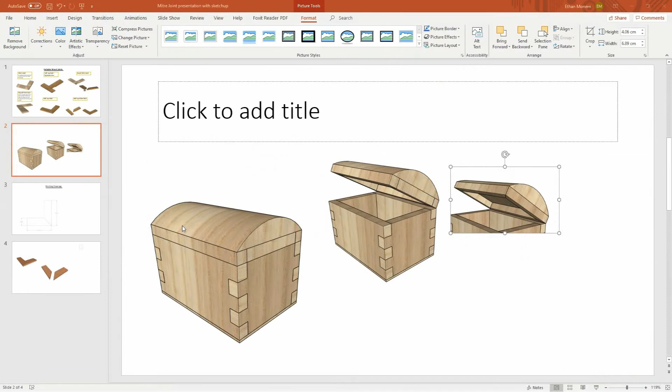Okay, now the next thing we want to do, once we have a final design, just going to close that lid. What we need to do is to create a working drawing from this. So we need to put the drawing with dimensions and we need to lay it out properly. So I did a basic one of our mitre joint. So you can see at this point I've got no rendering on it.

So a working drawing is just a line drawing. It has dimensions, properly done. And again, we can do this in SketchUp. Now, a working drawing has a view from the top, so we call that plan view. And then it will have side views, side elevations, and various others. Now again, in SketchUp, it's very quick and easy to do that.

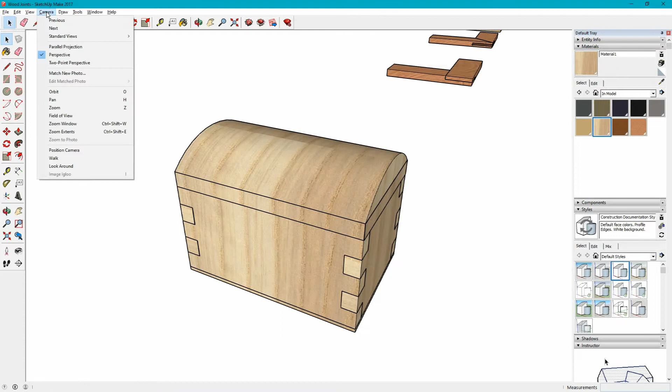So if I click on Camera, the first thing I want to do is take it off of Perspective, and I'm going to put it into Parallel Projection. So that's similar to, if I rotate now, similar to how you would have it, say, in isometric. So all the dimensions are roughly the same. You can see it distorts the view slightly.

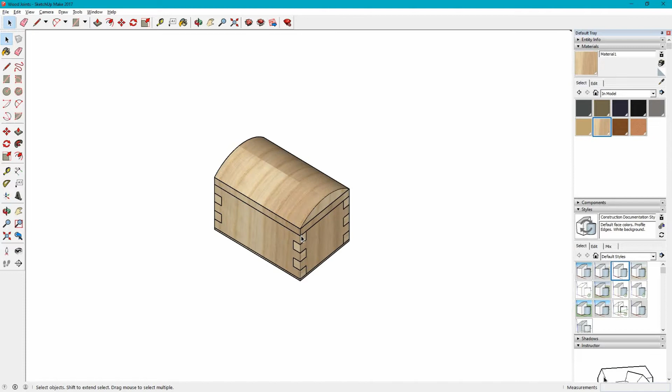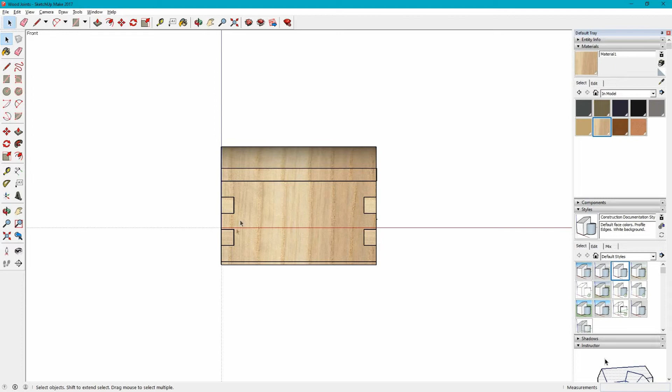So I'm going to go to Standard Views and then I'm going to click Top. So that gives me a top view of my drawing. If I click Standard Views and I click Front, okay, that shows me the front with respect to my axis. If I put the axis on, you can see that's the red and blue axis, so we're looking from the green axis. Again, if I go to Standard Views, there is an isometric view. Click Back, so that's the other side of it.

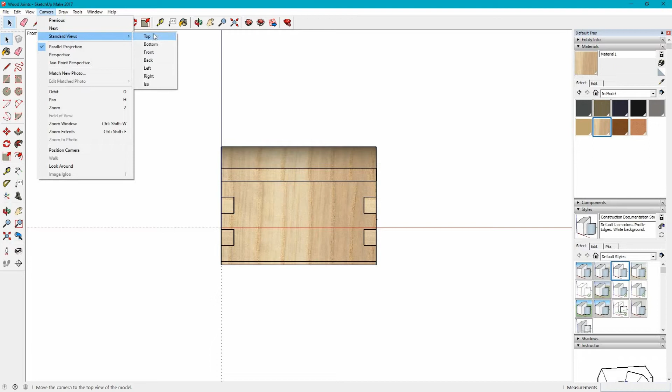Views, Front, I'll just look to the front. So if I go from the left, okay, that's the left view. If I rotate, oh, that's the wrong thing. Let's go back to that. So Left, so that's my left hand view. And you can see the view clearly.

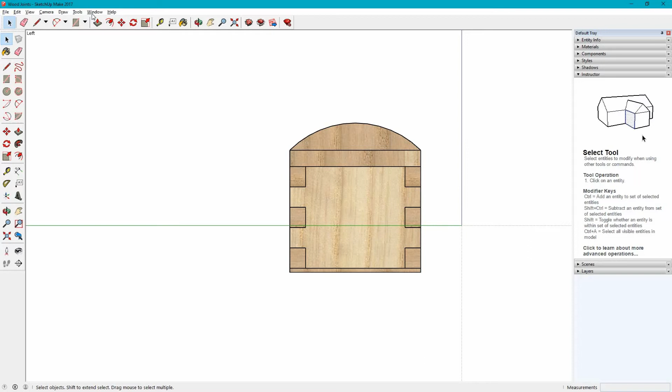Okay, so now before I put dimensions, it's quite helpful to be able to turn the dimensions on and off. So the first thing I'm going to do is to create a new layer to put dimensions on. So if you click Window, Default Tray, and then click Layers, now you can see I've already got it checked. So check Layers. Then in your default tray on the edge here, you will find a Layers button.

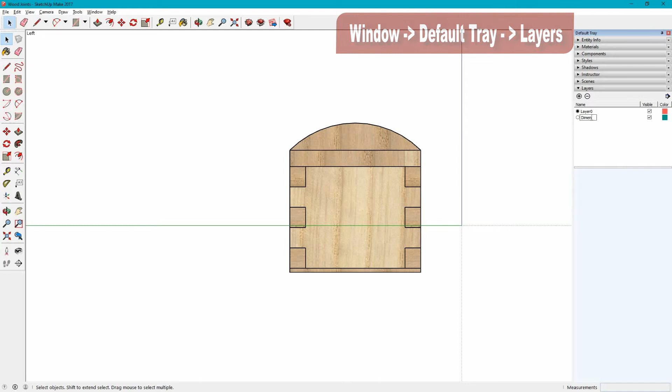So let's get rid of that one. Layers. Okay, now I'm going to add a new layer and I'm going to call it dimensions. Okay, I can then click the button to say that whatever I draw now is on this dimensions layer. Okay. So if you put all your dimensions on that layer, then we can make the layer visible and invisible.

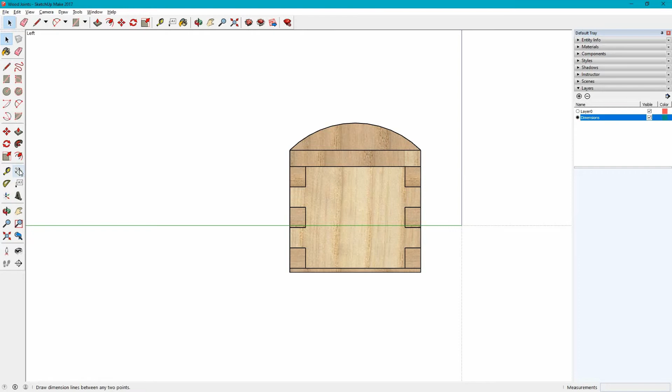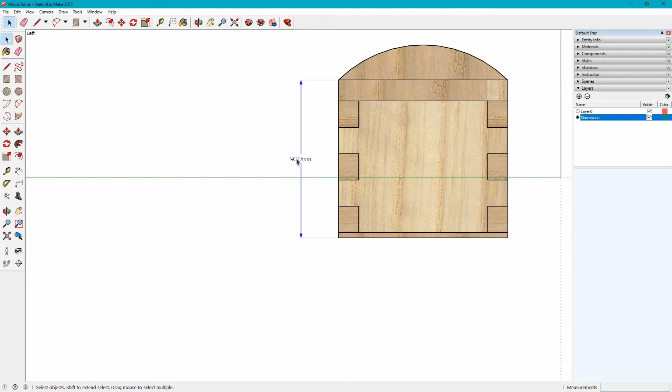Okay, so now I've got a large tool set here, so my dimensions are there. If you haven't, just go to Tools, come down, and there's the Dimension tool. So I click Dimensions. If I click to an edge, to another edge, okay, and then I can place that there. Now, the dimensions on here, because the writing is very thin, it doesn't show up too well. So we can change the position.

If we go to Window, Model Info, and then you can see there's lots of different things we can fiddle with. So I'm going to go to Dimensions. We can change whether you want arrows or not. We're going to keep them as arrows. Now we want to align to the dimension line, and we're going to select all dimensions, update selected dimensions,

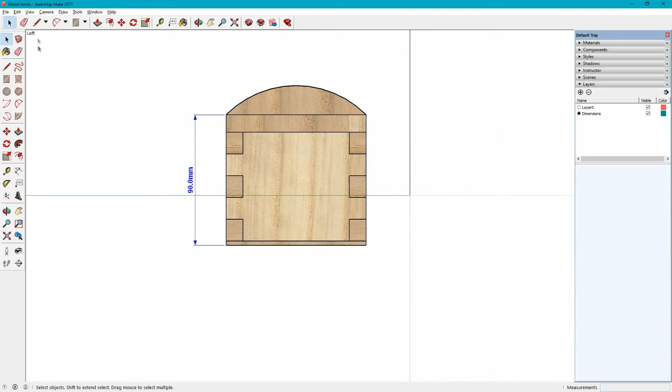and it will show us. Okay, to change the font so that it affects all of our dimensions, I'm going to click Arial bold to make it 14. Click Update and you'll see now we've got it running along the line, not through it. Okay, that should now apply to all dimensions that you do. Okay, so I'm going to get rid of the axis.

You can add in more dimensions, so it would be helpful to have one to show the width on the bottom there. You can dimension certain lines, but you have to be actively editing the component. So that blue line, you can see it's turned blue. If I click on it once, you'll see it adds a dimension. Could do the same down the bottom here.

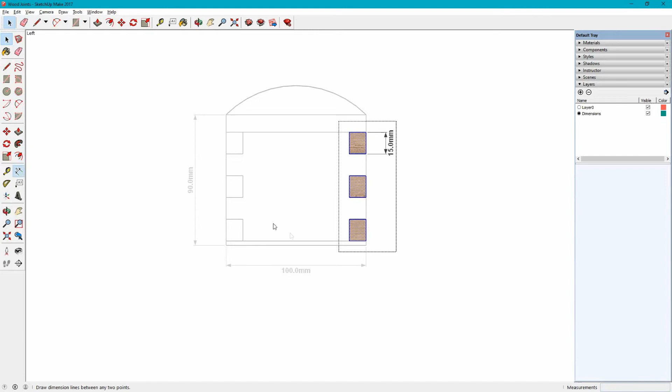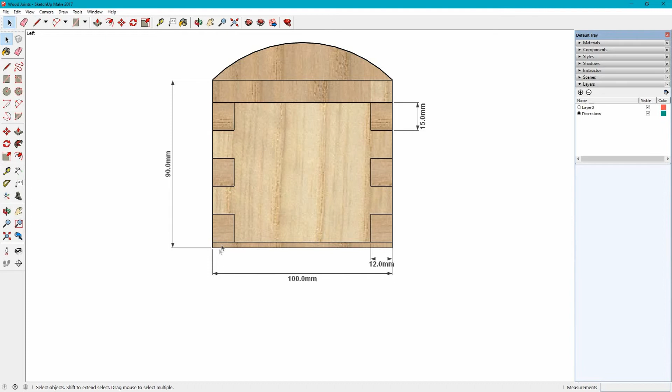So that's turned blue. Put a dimension on there. Okay, I'm going to come out of the edit. Now you can see I've got key dimensions in all of these places. Okay, the dimensions are what we call dynamic. So if I change, I'll just show you, if I go into here, if I were to change the height of this, you can see the dimension is changing with it.

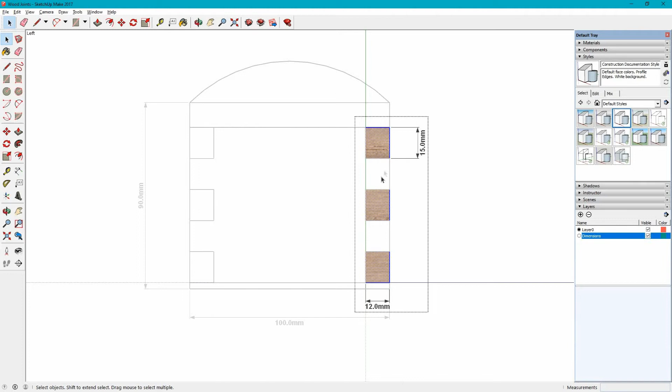Okay, just to go back to that, it's really important that your dimensions are part of the actual group. So you need to edit and then put the dimension in. That way, if you make any changes, your dimensions will dynamically change with any changes you make. Okay. Now, once you've got it set up, we don't want the render to appear on our working drawing.

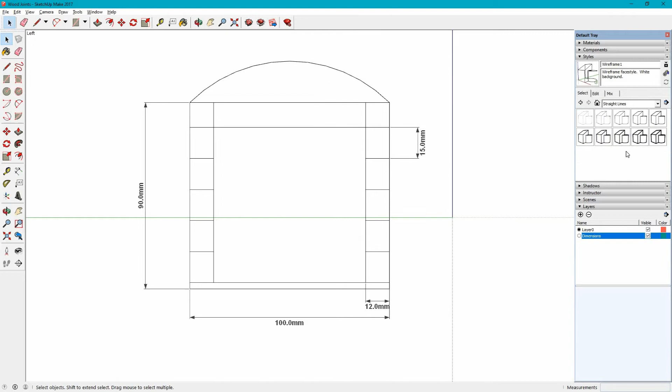So if you've got the online version, you can just click on wireframe and then you've got just a line drawing. I'm not sure about the online version, but if you click into here where it says different styles and we click straight lines, then you can find a straight line drawing which has slightly thicker lines and makes your drawing clearer.

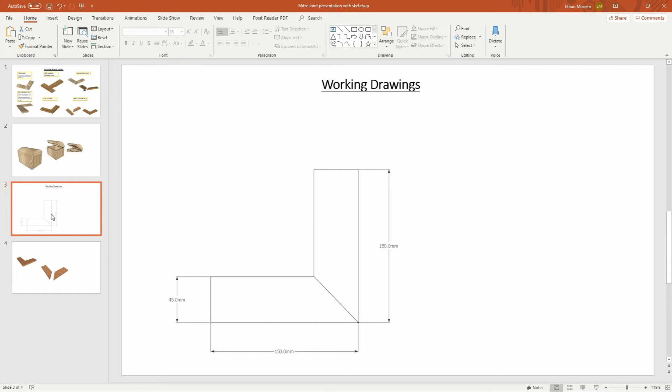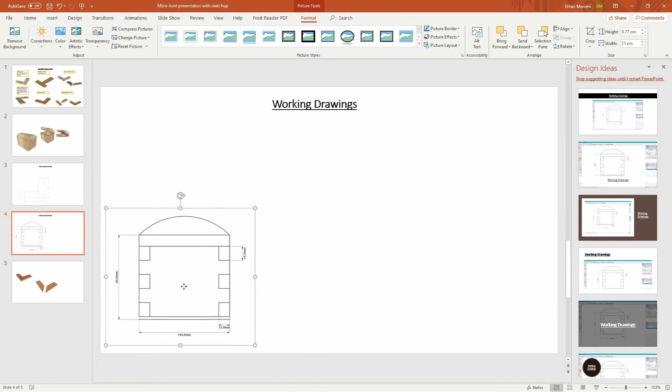Okay, once you're happy, print screen, go to your working drawings, create a new page. So I'm going to create a new page here which says working drawings, put in my dimension drawing, crop it down. Okay, that will be my end view. So if I go back to SketchUp,

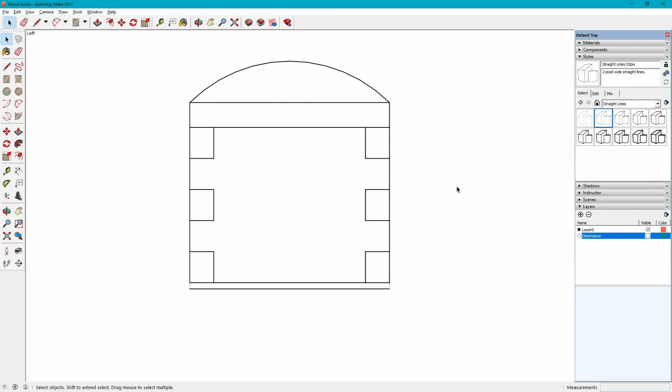now just one thing that I haven't shown you is in the layers, so my dimensions are on the dimension layer. If I go back to the normal layer and then hide, so if I select this to be invisible, then you can see the dimensions disappear. So if I wanted to do other things to this and the dimensions were getting in my way, I would just make them invisible. When you're adding them, make sure that that layer is checked, otherwise they'll be on the wrong layer. Because you can see as you rotate, the dimensions still remain.

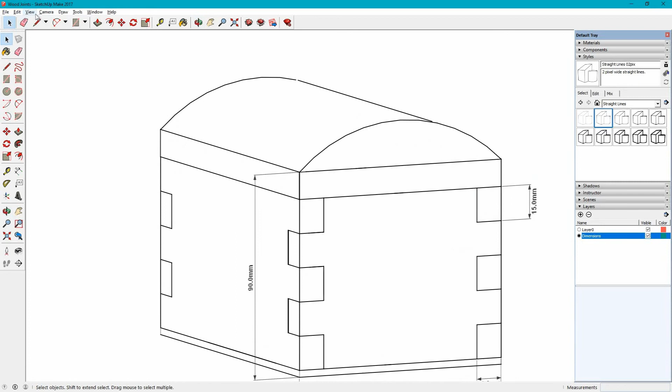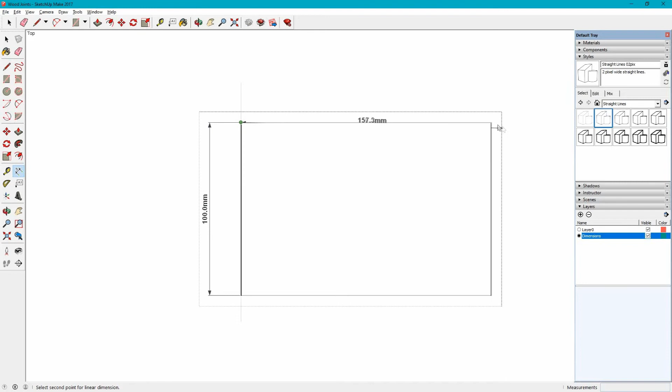Okay, so now let's do the top view. Okay, so I'm going to just double click. A dimension here. I'll put one in here. For some reason that's slightly longer than I expected, but for this demo, it doesn't matter. Print screen, go back, pop that in.

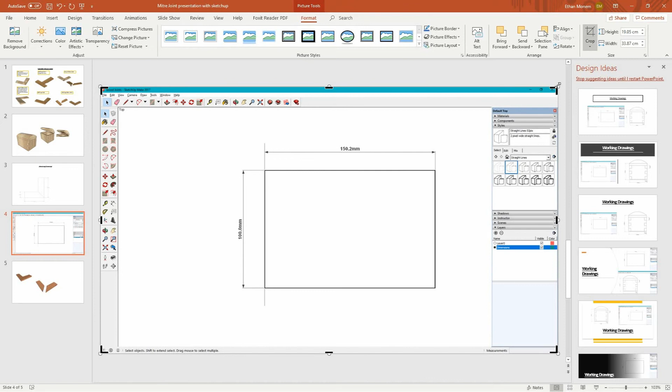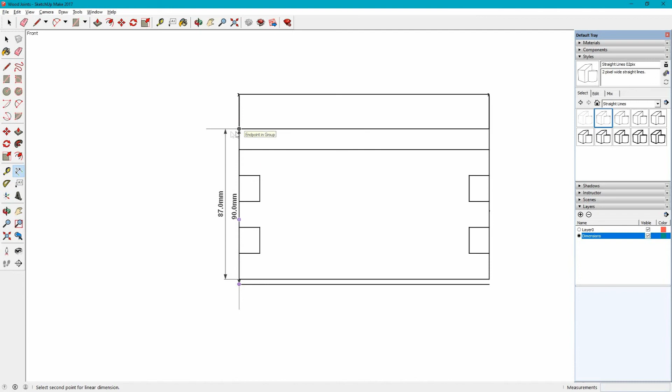For the moment, I'm just going to position them anywhere on the page, but you'll see in a minute that working drawings need to be placed in a particular way. So if I do a front view, then I can add in the same. So you can see that there, I can show the difference. So I could either put in 3mm or I can put in the full distance so you can see the difference.

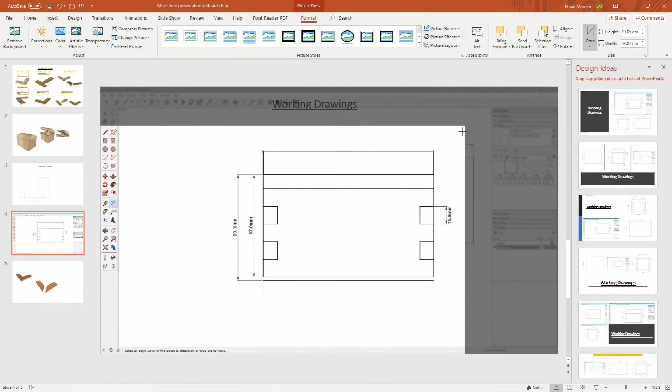You only need key dimensions on your drawings. Okay, I'm going to print screen that, pop that in there. Okay, now to meet what we call British standards, just going to make the white transparent so that we don't overlap. Your drawings need to be positioned in a particular way. So your plan view should be at the top. So that's my plan view.

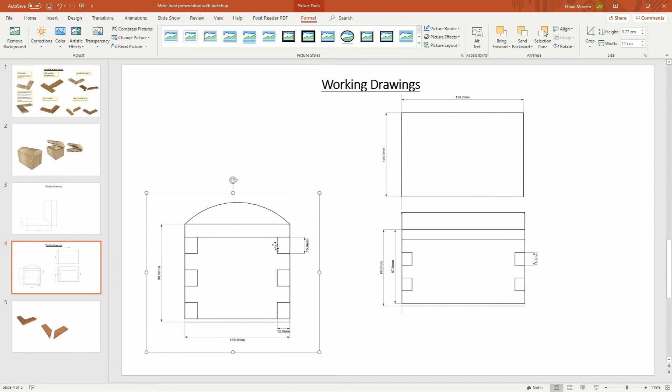Need to make that one transparent. Okay, then the side elevation will go there, and then the end view goes on the end. Okay, now you want them all roughly the same size, so I'm just going to shrink that down so it looks approximately the same size, and they should be in relation to each other.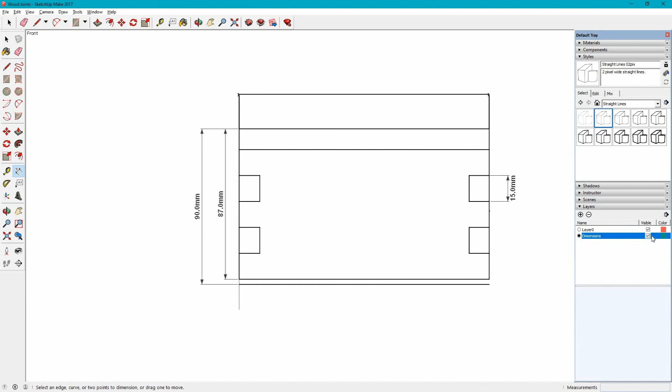Okay, so you can position them on the page, and there you have, slightly big, but it's fine. There you have a working drawing for our box. It's quite nice also in a working drawing to have an isometric view, so I'm just going to switch back to the normal layer, take that off, and then if I go to camera, standard views, isometric, just looking at the wrong thing here.

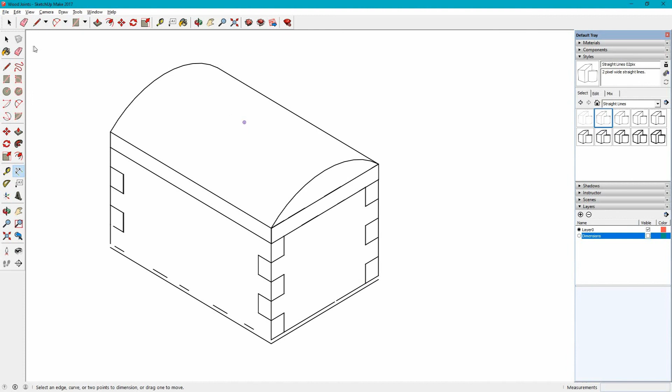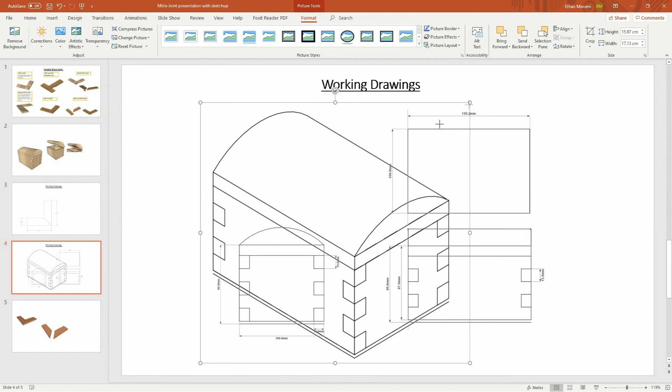Okay. Hit print screen again. Set the transparent colour, shrink it down, and there you have your isometric view. That is a good layout for your working drawings, and that's what we would expect to see once you've finished your final design.